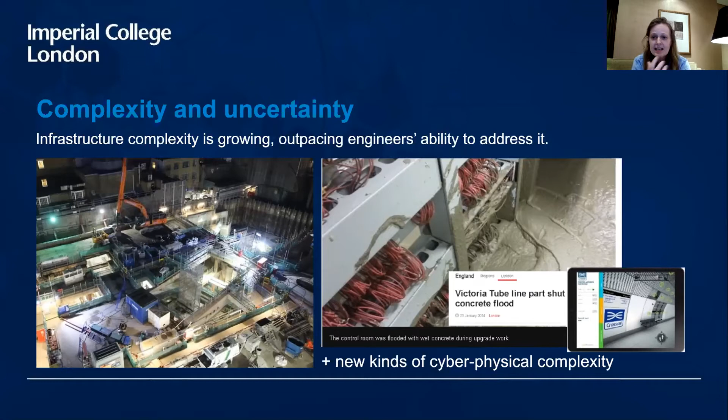And so I've been studying Crossrail in London, which has been described as open heart surgery in a patient that's still up and running. So a very complex set of interventions to build an underground railway through the centre of London. And also working with major clients like Transport for London, and exploring with them some of the interdependencies that they potentially didn't even know they had with water systems, or between different bits of their infrastructure.

And so our approach has been very much to see projects as interventions into these infrastructure systems of systems, as I was saying, and to understand projects across that whole scale, from the kinds of interventions that some of the major infrastructure owners might do to their existing asset base. And here I use the example of Anglian Water, which is one of the water companies in the UK, which does hundreds of thousands of little maintenance projects every year.

So although each of those may be of relatively small value, there's an awful lot of them, up to these sort of large scale mega projects, which are increasingly over 10 billion. So High Speed 2 in the UK is a 42 billion pound project, so a really massive project, at which point national infrastructure comes into view, and it becomes very nationally noticeable as a project.

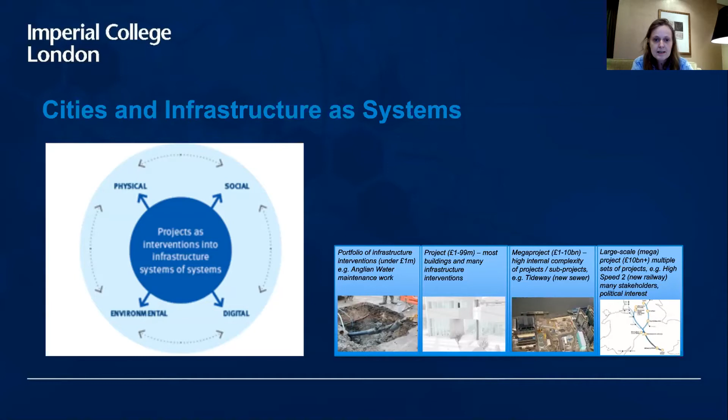And so we've really been thinking about how digital technologies are used in this space. And I've been involved in some of the policy making around the digital twin in the UK. They've set up a Centre for Digital Built Britain, and that's really been thinking about a national digital twin programme and developing a twin of national infrastructure. So they've been starting at what I would say is quite a large scale. It's not quite the Earth systems modelling, but it's at a national scale, trying to have a twin of infrastructure.

And to do that, they've been working with infrastructure owners and operators and getting them to systematize their data and to structure their data in standard ways. And they put together these, what they call Gemini principles, to think about how we put data together to build a twin. And they're pretty high level, and in some places a little bit contradictory, I would say.

But what's amazing is how important infrastructure owners and operators feel that these are for explaining within their own organisation what this is about, and the way that they're trying to collate data for public good, for value creation, for insight. They have to think about security. They have to think about openness of data. They have to think about quality and trustworthiness of data, essentially. And they have to think about how they federate, curate, and evolve those data sets. And so that kind of policy making has started at the very high level.

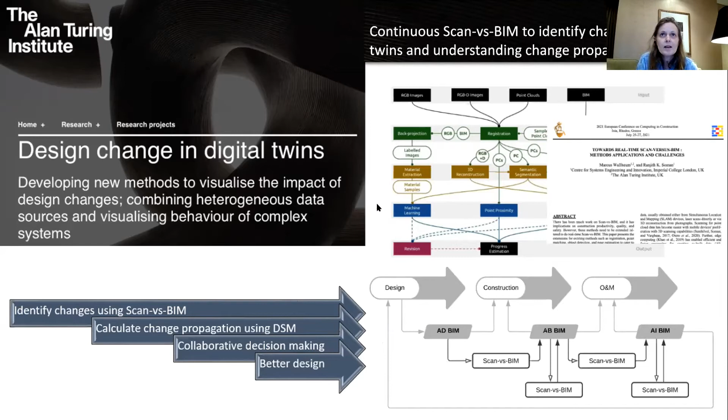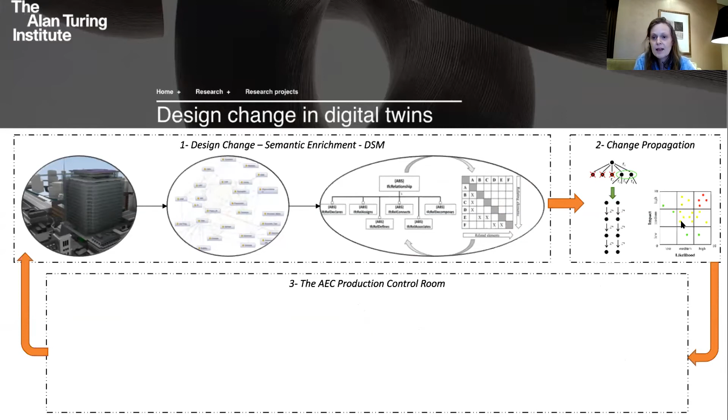Now, the ideas of digital twins have come a lot out of this operation and maintenance phase of buildings. We've been interested in looking at this into delivery of projects. And so this is an area that we're actively working in. And some members of my team are looking at this semantic enrichment of BIM data to understand relationships between components. Some members of the team are looking at the change propagation through systems. And we're also working on what's called an AEC production control room, which is about trying to make that technology available to the people that are making decisions on the site.

So one problem I would argue of digital technologies is that it tends to lock all the information into little screens that we all look at individually. And I think in a sector like construction in the built environment, it's important that those decisions are taken out of our little devices and made available to democratic decision making, but also to people in the supply chain that have expertise and can be involved in different parts of that process. And so we've been very interested in my team in these sorts of large scale displays and how people can come around digital information and have conversations about it.

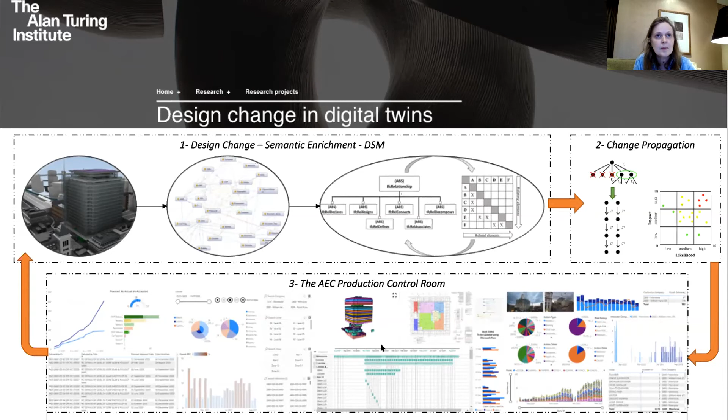And this is an example of one of those. This AEC production control room is set up in a couple of projects in London, and these are some of the displays that people are developing out of the data. So I'm going to just step back and talk a little bit about my work on digital delivery. So I've been looking at these mega projects in the UK over the past 10 years. So from Heathrow Terminal 5 to the London 2012 Olympics, to Crossrail, to Tideway, to High Speed 2. And digital has become increasingly intrinsic to the way that these projects are delivered.

And so in terms of project deliverables, I think increasingly they're thinking about delivering a digital twin, digitally enriched products and services. They're using the digital information to engage with their suppliers and get greater supply chain transparency. And they're using it in their relationships with owners and operators. And this is something that we've been tracking. And in the interest of time, I'm going to run quite quickly through the set of slides about these different projects, but I'm happy to talk about them afterwards or in the breakouts afterwards. So I would say Heathrow Terminal 5 is seen as a seminal project in the UK for beginning to use digital information.

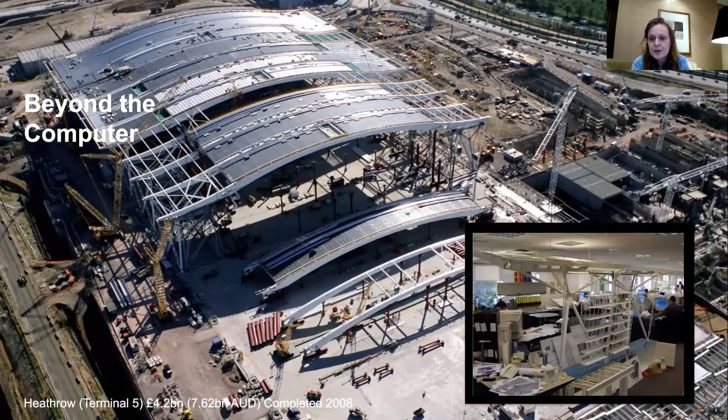Relatively crude technology by today's standards, but thinking about how to build large-scale infrastructure using digital as well as physical models. The Olympics, we were looking at how they then pass that data over to owners and operators, and some of the challenges of that data handover into what in London was a transformation phase after the Games, and then legacy uses afterwards.

We've also been very interested in how change is managed in these large data sets, and we've worked with Crossrail on this. And indeed, we did a study comparing how that happened in our sector in major infrastructure projects with how that happened in CERN and also how that happened in Airbus. And so we had people from Airbus and CERN and Crossrail sitting around the table discussing how they manage data in increasingly large data sets.

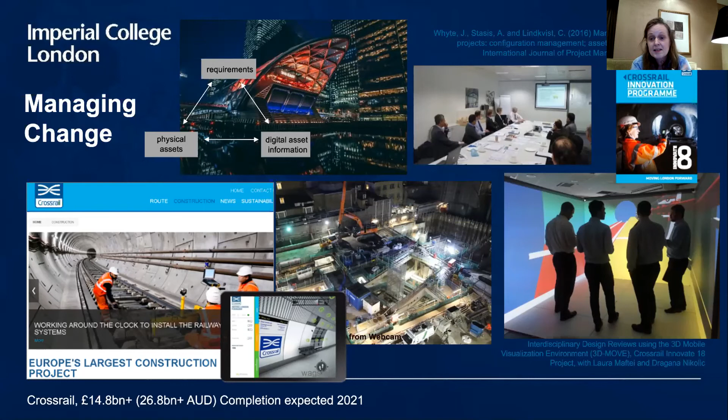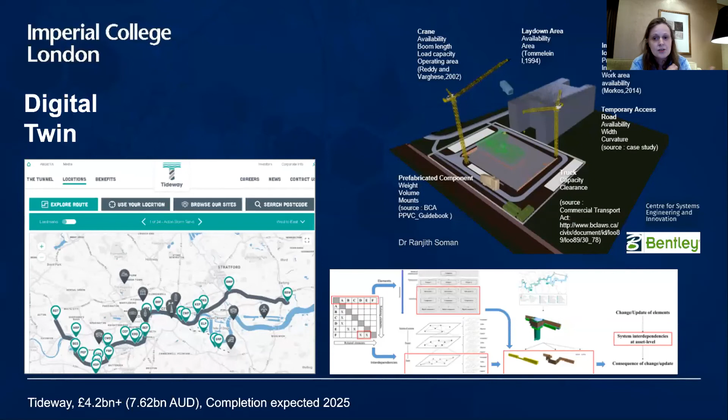And as these data sets get enormous, it becomes a real challenge for them to ensure that that data has integrity. And so we've been doing some work on that. And also then with another of the large projects in the UK, there's a big project to deliver a sewer through the centre of London, and we've been working with that and using their data and thinking about how you develop digital twins to understand the system.

So out of that trajectory of work on projects, we've really started to then look at how can you use the data. I would say when I started doing this kind of work, people said we need to collect data to collaborate, and I think today people say we need to collaborate to collect data. Yeah, because people see other uses for the data that's being developed.

And I'm leading a set of work for the National Institute for Data Science around data-driven engineering, design and uncertainty. So looking at predicting systems interactions and potential failures, model integration, problem structuring and scenario generation, bringing knowledge from operations into project delivery, managing design change, sensitivity analysis, this sort of set of interests of how do we use data to understand the systems that we're delivering.

And just to rehearse a couple of projects out of that. So we've been doing some work on looking at things like design assurance and are there ways that we can engage with the kinds of documents that come out of some of these major projects to understand better how to do design assurance.

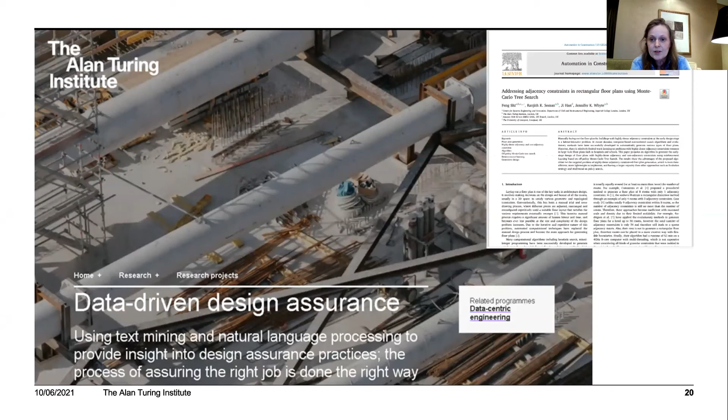We've been doing some work on what you might call very early stage conceptual design around those sorts of questions about what we should build, around infrastructures and urban mobility. So looking at using some mathematical modelling techniques to understand the kinds of mobility questions that we have around things like multimodal transport.

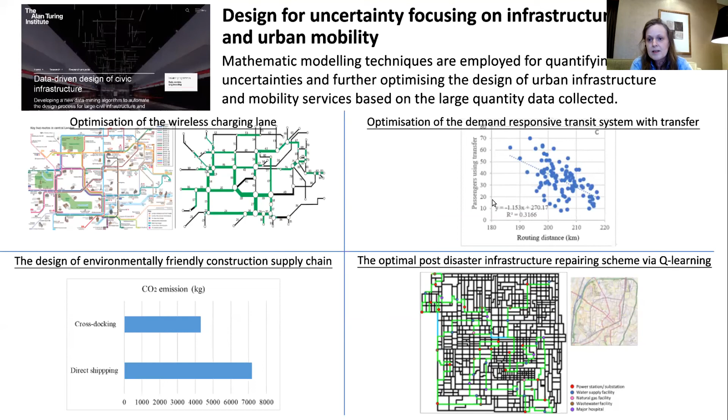And we've been doing some work on retrofit design in the built environment. So in trying to understand the kinds of decisions that are being made as we start to think about retrofitting our dwellings through the UK.

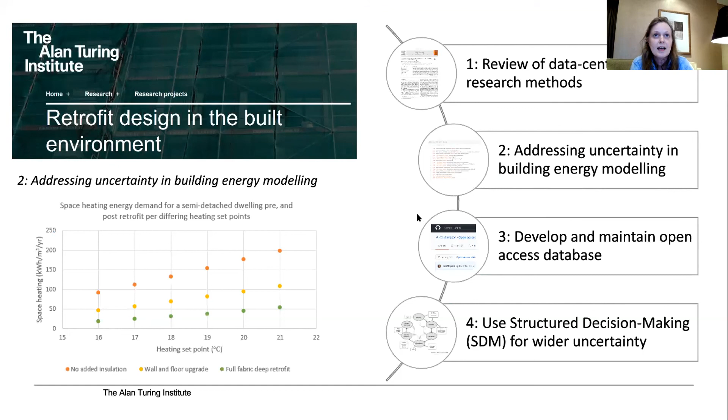And just one final project to share, which is a PhD that I supervised in this kind of area. And what's interesting about this work, which is by Dr. Ranjith Soman, is that he's really starting to link data sets. So starting to link building information modeling data from different databases. So one challenge that we have in construction is that data may be owned by different people, and so the question about how to aggregate that data is what this is looking to solve in some ways.

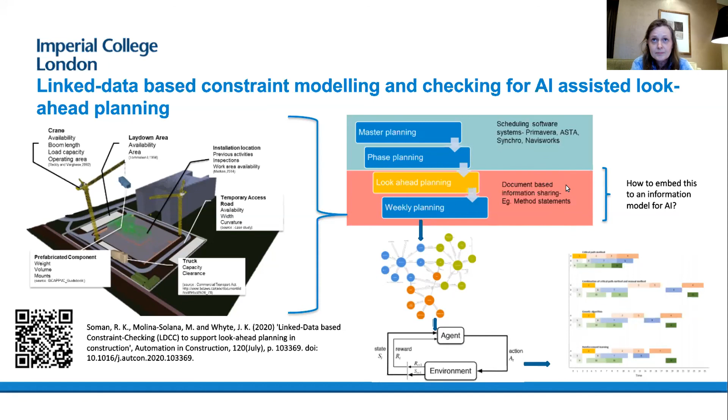It's looking to aggregate data using a linked data approach, and then to look at the 6-week planning horizon on site. So not the master schedule, not the day-to-day planning, but the kind of 6-week look ahead planning, and how can you do that better on the construction site. So trying to embed this information into a model for AI.

So just some concluding remarks, and to leave a little bit of time for discussion. So I think the digital technology is a friend and a foe in some of the worlds that we're moving into. It sort of adds complexity into some of the systems as we're starting to put sensor networks and so on into the systems. It can be a friend in delivery, but information can kind of get locked into these devices. And I think there's questions about how quickly we can change the way we work.

One of the problems of digital technologies and infrastructure projects is that, even projects, never mind the operating asset, but even projects take a very, very long time, and digital technology is changing super fast. So how can we use digital flexibly to support decisions is the sort of question that I would leave you with. And I think there's new challenges and opportunities around understanding infrastructure in cities within the built environment. And the question is really how do we use data as a friend in that work?